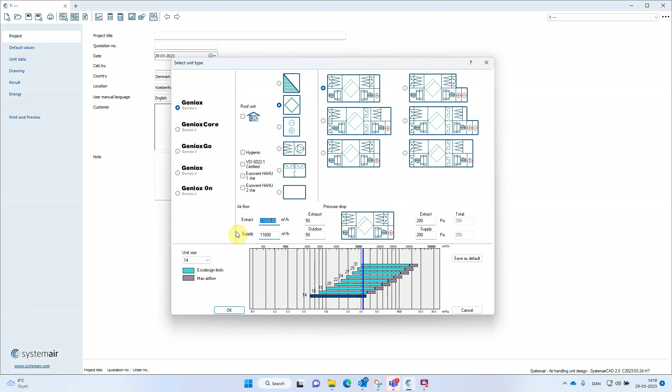Welcome to this demonstration video of the new release of SystemairCAD from 2023 week 13, called H7. The first new feature I'm going to demonstrate is an eco version of the counterflow heat exchanger. So let's select a counterflow heat exchanger for 11,600 cubic meters an hour in a Geniox 18.

Change the plate heat exchanger to a counterflow type, and let's start with the type B that has the lowest performance but also the lowest pressure drop. Let's calculate. Here we can see that we actually fail on the thermal efficiency. We are just shy of the requirement of 73%. But we also fail on the SFP internal limit with quite a margin.

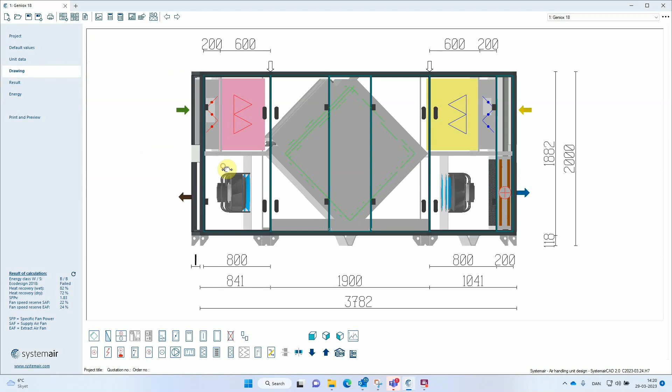This says that we somehow need to reduce the internal pressure drop of the unit selection. And one of the ways to do that is actually to select this new eco version of the counterflow heat exchanger. So let's select that by checking this box in the dialog. And now we can see that the height and the width of the heat exchanger section is changed. What happens is really that we insert the heat exchanger section from a Geniox 20 into this Geniox 18.

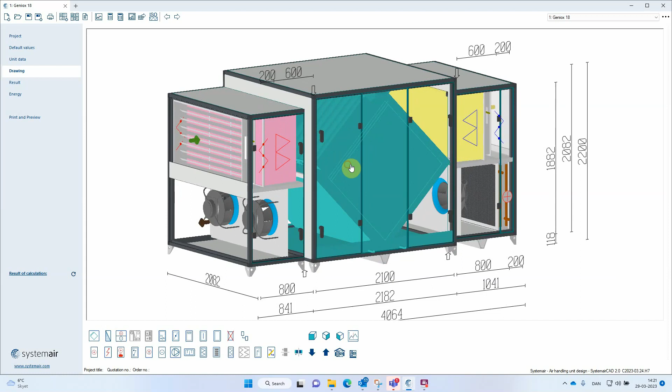So let's try to calculate. Here we can see that if we compare the calculated values to the previous calculation, our efficiency has increased to 75%. That's a good margin to the 73% limit of eco design. We can also see that the SFP internal is reduced significantly. Now we are down to 607 if we compare to the previous calculation.

This is actually a way of getting more airflow out of the same unit size. And since we have a margin here on the SFP internal and the efficiency, we can even increase the air volume more than the 11,600 that we have right now. If we have higher requirements, for example 80% EN308 efficiency, then we have to change to the type A heat exchanger.

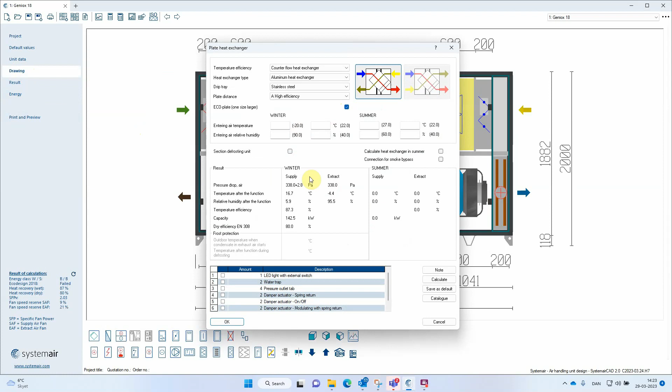Let's take type A and let's check if the standard version can actually meet the requirements in the first step. We calculate. We actually hit the 80% spot on for the thermal efficiency, but we failed with quite a margin on the SFP internal limit. So once again, we need to reduce the internal pressure drop of the unit. And as we saw in the previous example, let's select the eco type heat exchanger like that.

And once again, we can see that the width and the height extend. Here we go. And now we can see that our thermal efficiency increased to 83, still good margin to the limit, and also the SFP internal was actually reduced quite a lot. And now we are comfortably within the limit of eco design. And in this situation, we could once again increase the air volume in the unit.

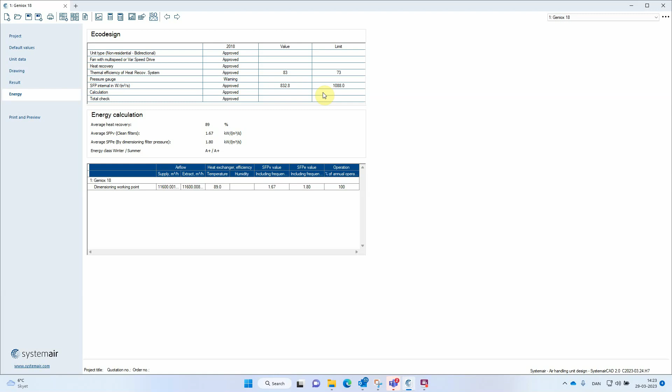This gives me a lot of options to really tune and optimize the performance of my air handling unit, because I certainly have this new eco design option to really optimize my unit to the specified requirements.

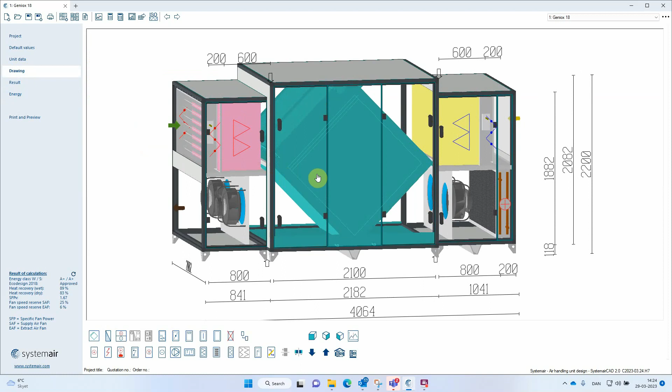These eco type units, even though the unit height and the unit width are different, will also be available as roof units or outdoor units. All roof types will be supported. And if I select the polyvinyl chloride roof here, we can see that it is added to all three sections.

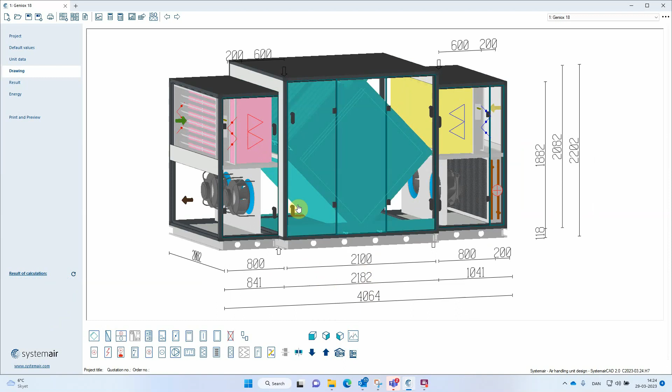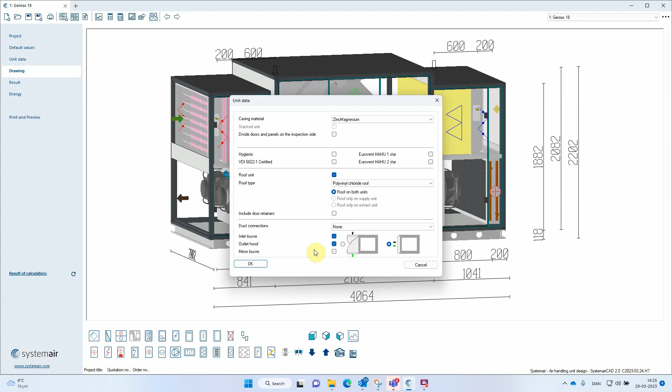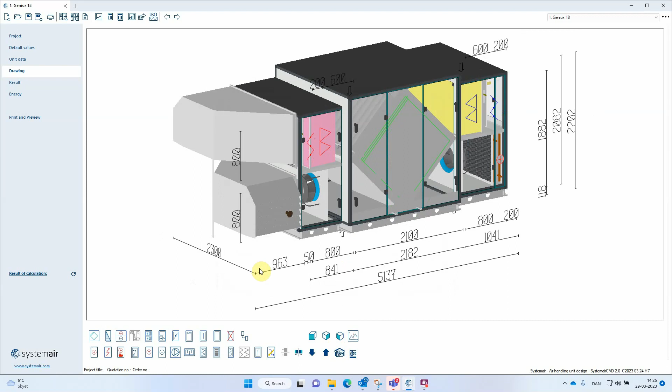We also have a new louvre option for the outdoor units. It was introduced for Geniox Core in December 2022, but now it's also available in Geniox 10 to Geniox 20. It is this louvre where we angle the airstream 90 degrees, so in this example we will have the outdoor air inlet on the inspection side and the exhaust on the back side. We can of course also mirror the louvres so that we will have the exhaust air on the inspection side.

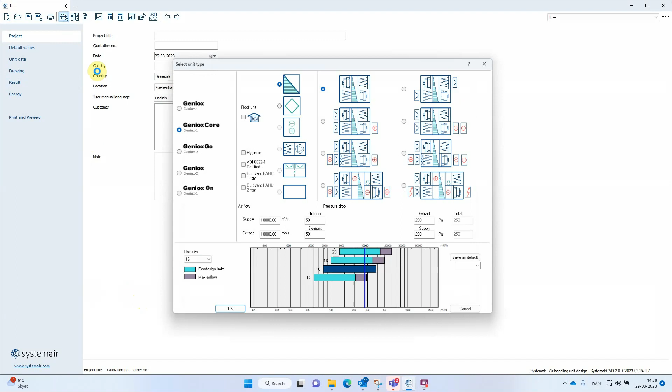Let's look at some of the other features that we implemented for this release of SystemairCAD. Let's just configure a standard rotary heat exchanger unit. We can use a Geniox 18 once again. We've always been able to insert a pre-filter. It's inserted as a separate function and it has a length of 200 millimeters.

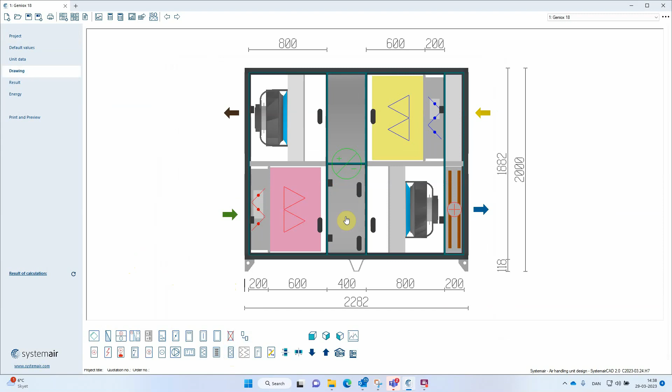But there's been designed a new combined filter option where you can actually add the panel filter in front of the bag filter, and you can still select from the same filter classes as before for the pre-filter. The difference from the old design is that now we attach both filters to the same filter wall, and by doing this we can reduce the unit length by 100 millimeters. In this situation you can of course not put any functions between the pre-filter and the bag filter.

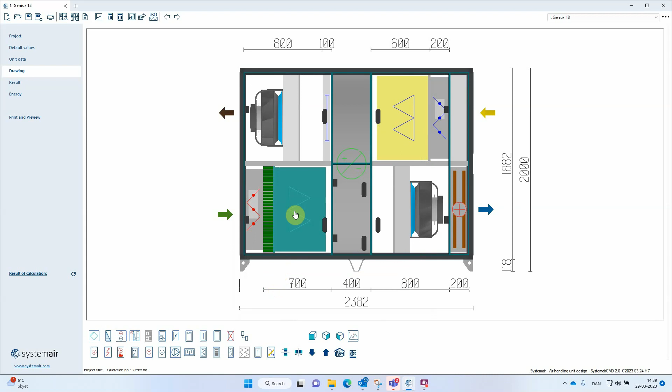We also extended the functionality of some of the duct components for the larger unit sizes. So let's configure a Geniox 27. Once again we can use a rotary heat exchanger unit with heating and cooling. Now we can actually place dampers in the duct, also for Geniox. This has been a unique feature to Geniox Core, Geniox Go and Geniox 2, but now it's also a part of the Geniox 1 selection.

Of course there's no reason to have two dampers, so let's delete the other one. We can also move an internal damper to the duct position. Let's apply some duct connections so it makes sense with these duct components. We still of course have access to preheaters.

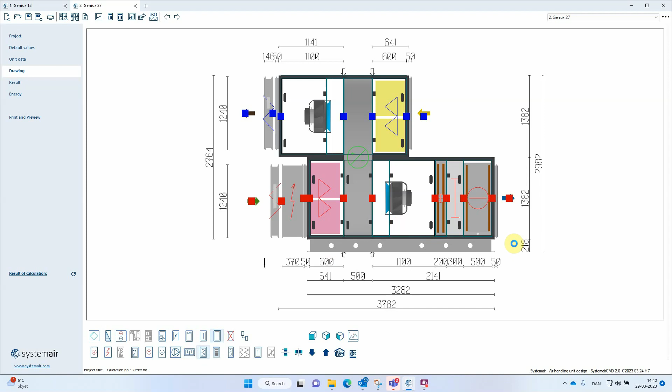We can also place duct sound attenuators, and this is new. They were only implemented from Geniox 10 to Geniox 20 in previous releases, and also in this situation we are of course able to select between the different distances between the baffles, but we can also select a smaller size of attenuator.

Let's have a look at the new DX changeover calculation. So I prepared a little Geniox unit here up front, and if I go into the changeover function, it is by default selected as a water coil, but I'm able to select a DX changeover coil here in the coil type drop down.

And what I can see is that the optimize function is disabled for this DX changeover, and that's because we often would like to have a minimum internal coil volume, and of course the best option is to have a P25 coil. That is the thinnest internal piping that we have in our selection. We can still select from the different plate distances, but otherwise the coil selection is pretty much as it is for a water coil.

We can see that we have the specifications for cooling. Here we can define the required supply air temperature in cooling mode. We can define the required supply air temperature in heating mode. And over here to the right, we have got the evaporation temperature and the condensation temperature.

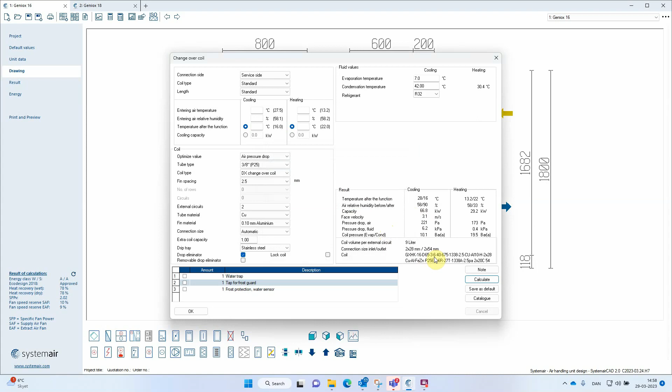And in this situation it says we cannot create one with one external circuit. You need a result for two. Yes, please. Okay. And now I can see that I actually get a 6-row 40 circuits coil. The internal volume per external circuit is 9 liters, and I have 2 external circuits.

My temperature in cooling, 28 degrees in, 16 out. In heating, 13.2 in, 22 degrees out. I have 66.8 kilowatts in cooling, 29.2 kilowatts in heating. And we can see that the corresponding condensation temperature to provide the 22 degrees here in operational conditions is 30.4 degrees.

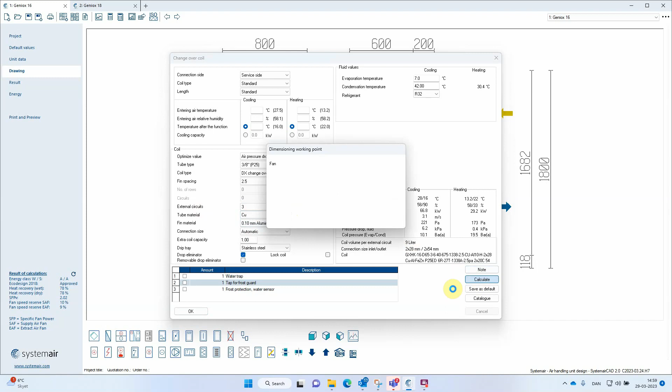We have the possibility to sort of adjust the internal coil volume per external circuit. We can do that by selecting 3 external circuits instead of 2. So if I calculate the changeover coil once again, we can see that the coil volume per external circuit is now reduced to 6 liters.

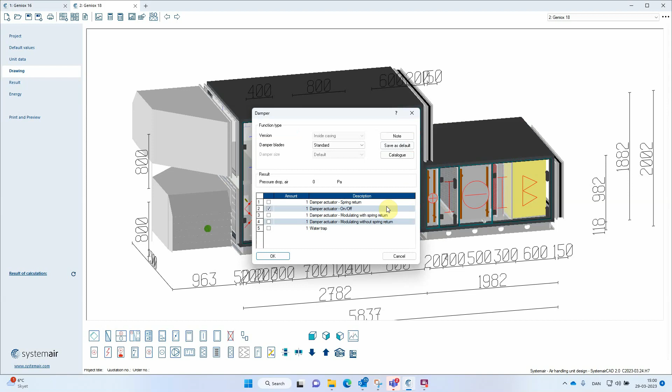We also changed a bit in the printout. So I did a second Geniox unit here. It's selected as an outdoor unit. I selected it with a preheater and a heating and a cooling coil. I selected a valve for the cooling coil. I selected a damper motor here for the dampers, an on-off motor for the extract air, and a spring return for the supply air. And let's try to calculate the unit.

We also made a small change for the result dialog. As you can see, we sort of divided this right side column in two. We added the SFP value for the single fans, the supply air fan and the extract air fan, but we can still see the total value down under the unit information below the line. Energy class winter and summer is exactly as they were.

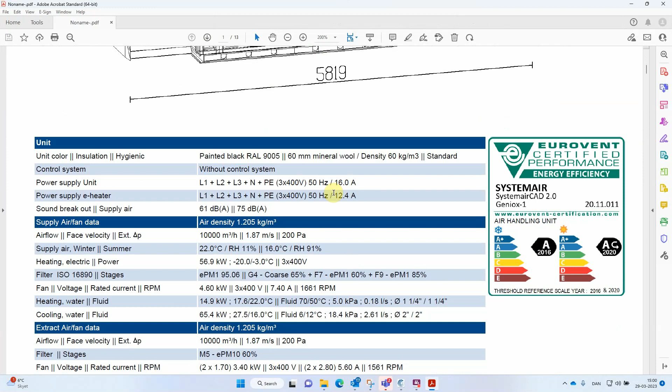Go to print and preview and select only our unit 2, full specification. Yes, please. And let's move the printout to the shared screen here. The major change here in the printout is the short technical description, and here we can see that we have divided the data in 4 categories: unit data, supply air fan data, extract air fan data, and energy.

In the unit section of the table, we can see that we have the sort of casing configuration description. This is painted black, 60mm mineral wool, and it's standard hygienic. There's not selected a VDI 6022 or a Eurovent 1 or 2 star hygienic certification. The unit is without control system.

We have 2 power supplies, one for the unit, 3 times 400 volts, 16 amps, and we have one for the electrical preheater, again 3 times 400 volts and 12.4 amps. Then we go into the supply air, and here we first have some general information about the airflow, the external pressure, and the target temperatures and humidities.

And then we have the functions in the order that they are installed in the unit. So here we have the preheater, we have the filter, we have fan, heating, cooling. Then the extract air, we have again general information, airflow, and then we have filter and fan. If we check the filter information, we also inserted this filter ISO 16890 if there is more than one filter stage.

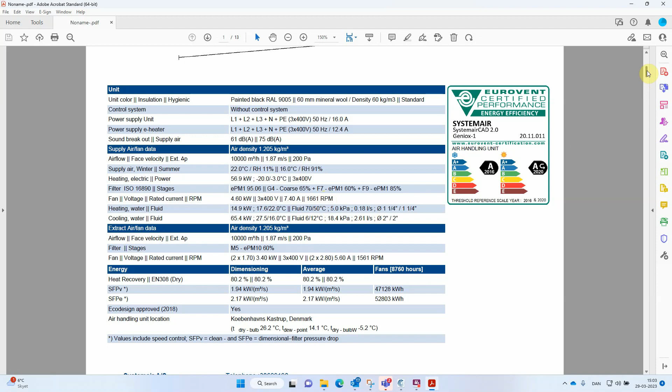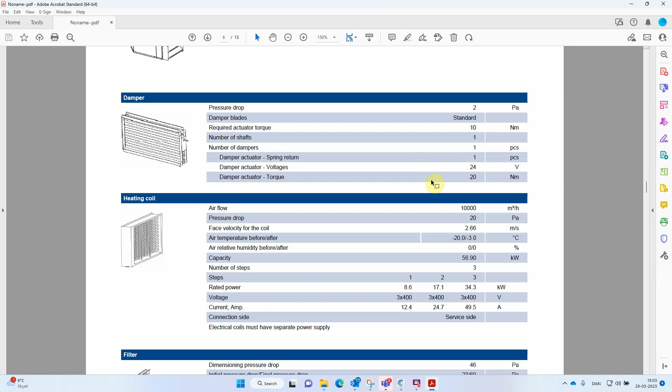If we move down to the damper, here we go. Then we introduced a required actuator torque for the dampers, and the minimum requirement is 10 Newton meters in this case. But we also selected an actuator for this damper. It is a spring return. It's 24 volts and it has a torque of 20 Newton meters.

So this concludes my demonstration of the new features in SystemairCAD release H7. Thank you for listening.